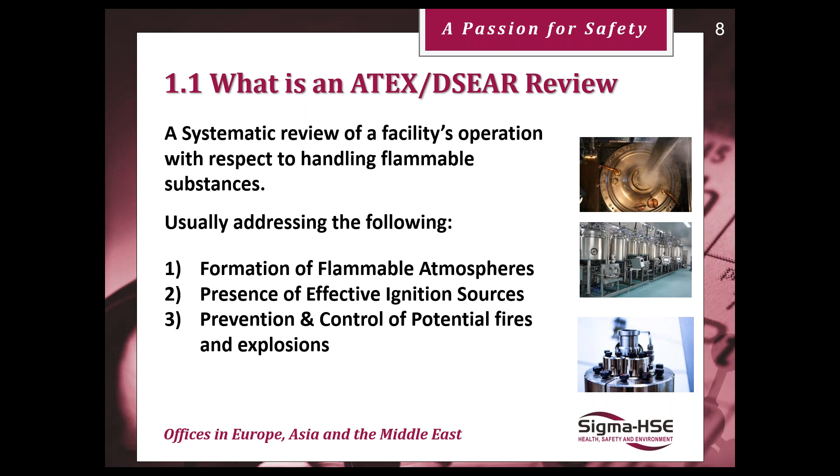So one part of your DSEAR assessment will define that basis of safety around those three aspects: trying to avoid flammable atmospheres, either by working under vacuum or working under a nitrogen inertion system, or working at temperatures below the flash points of liquids; avoiding ignition sources, having ATEX certified equipment, whether that's electrical or mechanical, if it's present within one of those hazardous zones; and then having our explosion protection of venting, containment or suppression, coupled with explosion isolation. So if an explosion does occur in one item of plant, it doesn't progress onto other items of plant and cascade, if you like, through your processing operation as a whole.

Okay. So the hazardous area classification has determined these zones, and it has also, by calculation or other means, determined the extent of that hazardous area, the size of it, whether it goes up, whether it goes down, dependent on vapor density, or how big it is. Are we measuring a 0.5 meter zone around the release point, or are we talking a 3 meter zone around the release point? And the whole idea of the legislation is, if there are potential sources of ignition within those hazardous extents, then the equipment needs to be specially protected, so-called ATEX certified equipment, which effectively just means that those pieces of equipment have been designed and built to reduce the probability of that item of equipment acting as an ignition source in its own right.

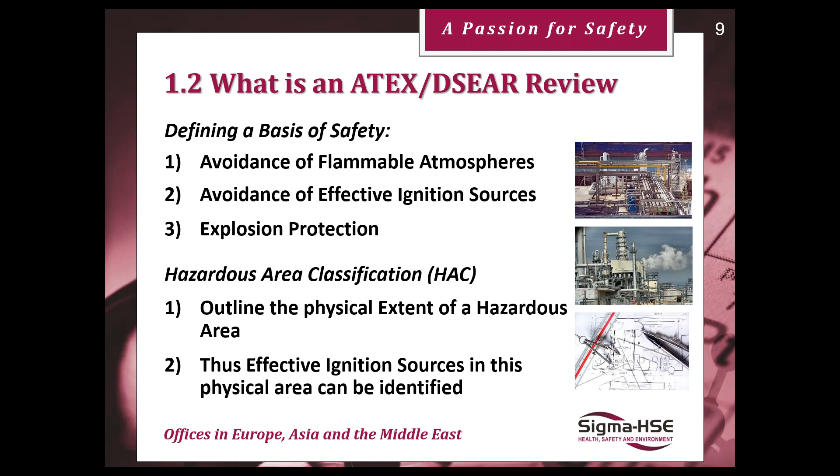So the review is simply something that we undertake when the risk profile has changed. The legislation doesn't actually state how often a review should take place. As with most legislation, it's all based on risk assessment, and it never really stipulates how often a review of the risk should be undertaken, with some exceptions. If we're talking about major accident hazards, typically in the UK under the COMAH legislation, or in Europe more widely the Seveso legislation, that does require a formal review every 5 years. But there we're talking of major accident hazards rather than more general hazards, even though we're dealing with fires and explosions.

You've got to remember that this legislation, ATEX and DSEAR, isn't dealing with major accident hazard events. It's dealing with what I call operational weeps and seeps, things we expect to happen on our processing equipment. We expect a flange to leak occasionally. We expect a pump seal to leak. We don't expect a 10,000 litre storage tank to just break open and release its whole contents into the bund. Yes, that can happen and has happened, and if you're doing major accident hazard risk assessments, you would consider these things. But the likelihood of those consequences is a lot lower than the smaller consequence but higher likelihood events that DSEAR and ATEX are addressing.

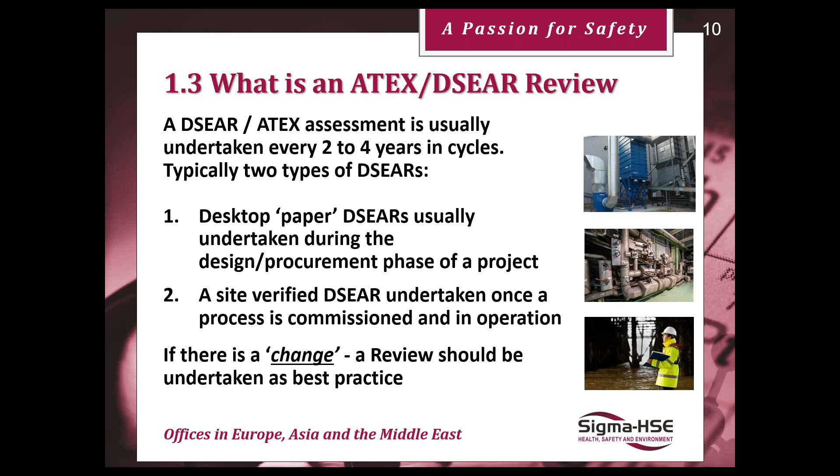But what the legislation does say is if there's a change to the risk profile, then the DSEAR risk assessment should be reviewed. And as I say, best practice is really, even if there's no changes, every 2 to 4 years is considered suitable. Why do we need to do it? Well, to make sure that the process remains safe. We've put a lot of work, we've put our measures in place. They all need to be effective to make sure that the overall system is safe enough and we're compliant with the legislation. So it is a legal requirement.

It also gives you the opportunity to refresh people's awareness of what DSEAR and ATEX is around and the measures that you've installed and how they're supposed to be operated and maintained and inspected properly. And after 20 odd years of the DSEAR legislation within the UK and the ATEX requirements in Europe, finally the insurance companies have cottoned on to the fact that processes involving potentially flammable and explosible materials really need to have a DSEAR assessment. So we get lots of work this way: insurance companies come in to assess the risks, ask the question, have you got a DSEAR assessment? And very often, even now, they're getting blank looks because nobody knows what a DSEAR assessment is.

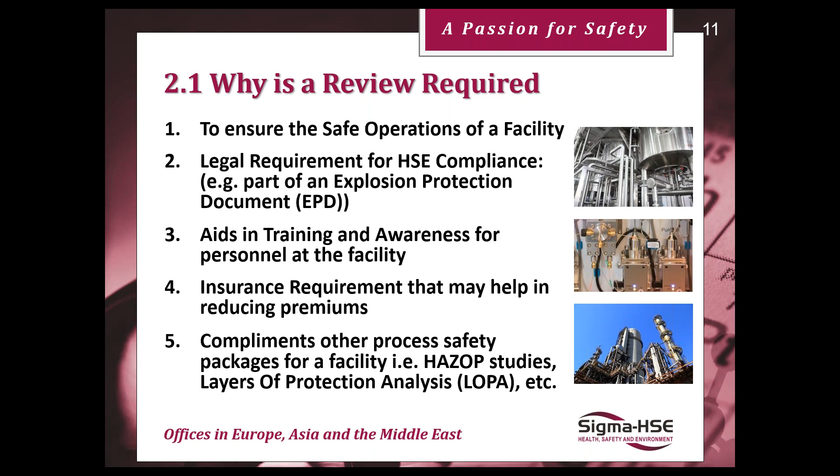But it's just another risk assessment. It's nothing different really, other than it's got specific requirements under specific legislation. But it will complement other process safety studies that you may have done, like HAZOP for new designs, like HAZIDs, like what-if scenario analysis, layers of protection, and so on. All of these studies, when they identify a hazard, you will write down the measures that you've got in place to prevent, control, or mitigate that hazard. And some of those measures will be specific things like having ATEX equipment, ensuring that ventilation systems perform effectively to keep the flammable atmospheres eliminated from your process, and ensuring the integrity of your nitrogen inertion systems, and so on.

Other reasons why a review may be required: just like any risk assessment, it's as good as the people on the day doing that study. We are tasked with almost an impossible task under any of the legislation because the first step in our hazard identification is identifying all of the hazards. And that can be a very tall ask, but that's what we're tasked with. So if we forget a hazard or we don't realise there is a hazard, then of course we won't have put any measures in place to protect ourselves against that hazard or manage it. Although the legislation, ATEX and DSEAR, is relatively simple in its concept, as with most things, it can get pretty complicated very quickly.

So electrostatic hazards may have been overlooked. Dust and powder hazards may have been overlooked. We may not know the specific dust explosibility of the materials that we're using. We're relying on MSDSs that just tell us that a powder may burst into flame, which is very typical. But we don't actually know, for example, how much energy is needed to ignite this dust cloud. Is it a few millijoules or is it more than a joule? It makes a difference.

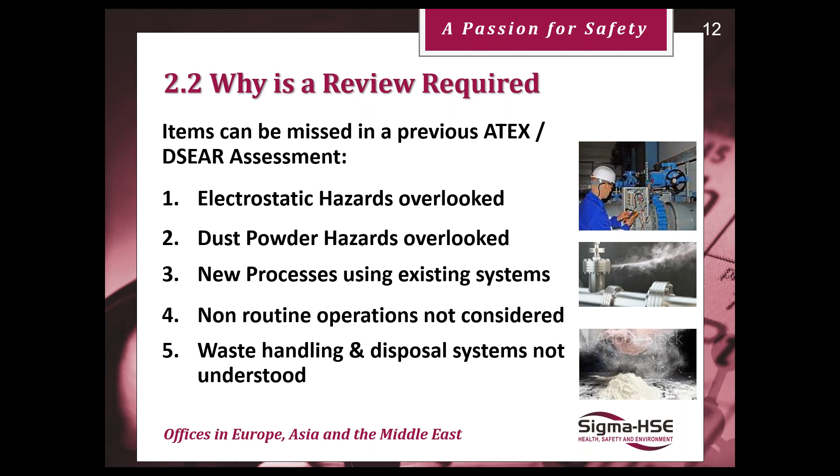We could have added new processes using existing systems, although hopefully these will have gone through the management of change, and that will have prompted us to at least review the ATEX and DSEAR assessments. Very often, DSEAR assessments focus on the routine operations, but don't necessarily focus on things like maintenance. For good reason, because for many maintenance operations, part of the approach, especially if we're working under permits, is to remove the hazards at source, to flush the lines clear and remove any flammable vapors. And of course, our waste handling and disposal systems may not be fully understood in terms of their hazard potentials. So just a few reasons there as to why we should be doing a review.

When a review is required, normally your DSEAR assessment will be split into what we define as unit operations, things like material loading and storage, or material transfer operations, or mixing and blending and grinding and so on, all of which can change. You know, performance of the ventilation systems installed, the extraction systems installed, may not be the same as they were when they were first put in. The materials that were handled may not be the same.

And this is really important when we talk about combustible dust, where we know, if you've listened to some of our previous seminars, we talk ad nauseam about particle size distribution being important for the generation of combustible dust clouds. So with a standard solvent, say toluene or acetone, we know things don't really change. We can have a different supplier of toluene, and really it doesn't make any difference to the risk assessment.

But if we change our supplier of a powdered product and it turns out to be having a larger dusty component, you know, it's been ground more, or part of your processing operations, you're grinding the material finer for a particular product or whatever, then of course the precautions that you've got built in may now not be suitable, or may need upgrading to deal with this lower particle size. Okay, and things like that.

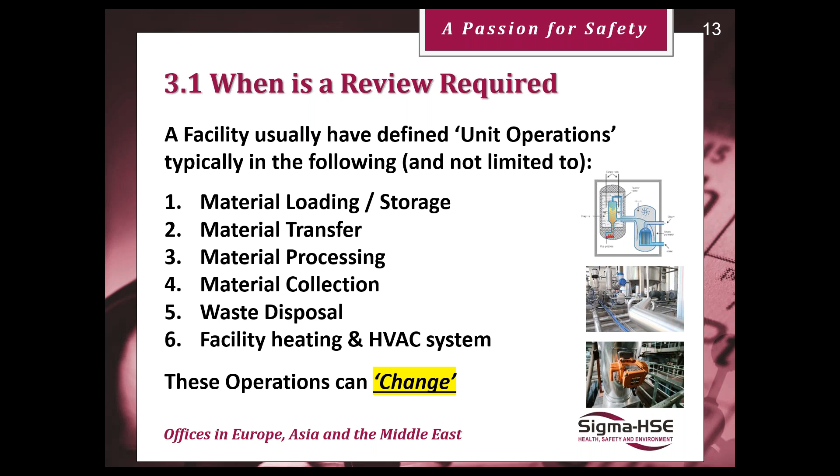So lots of things can change, and we need to be able to get at those changes and assess them properly to make sure that the systems we're employing, the methods of preventing ignition sources, the methods of controlling flammable atmospheres, the measures for ensuring that the venting is sized appropriately, and so on, may need to change if we go for different suppliers of existing materials.

So when there's a change, when we introduce a new process, material, or equipment, or if the equipment's starting to get old. Nothing wrong with old things generally, there's nothing wrong with old people like me, but generally as things get old, we need to look after them better. I rattle a bit more now than I did 10 years ago because I have to take certain pills every morning. That's a fact of life with older people. It's equally a fact of life with older equipment. We may not be able to get exactly the same seals on that piece of equipment that we used to get because it's now getting on in years.

Changes to an existing process. So as I say, running the batch time longer. You're being very successful, so instead of 1 batch a day, you're now doing 10 batches a day. Nothing's changed from the hazard point of view, but your zoning may have changed. Where before you could say that it was a zone 21 or a zone 1, it may now, because of the frequency of operation, actually be a zone 20 or a zone 0.

Okay. The way we do things might be different. We may have started adding flammable liquids below the surface of water, and that controls flashpoint really. But we may change, and standard operating procedures may change and say, well, we add the flammable liquid into the pot first, and then we put the water on. So things like this may change. Your ventilation characteristics in your rooms or in your buildings or around the facility may change because they become more congested, or the performance falls off.

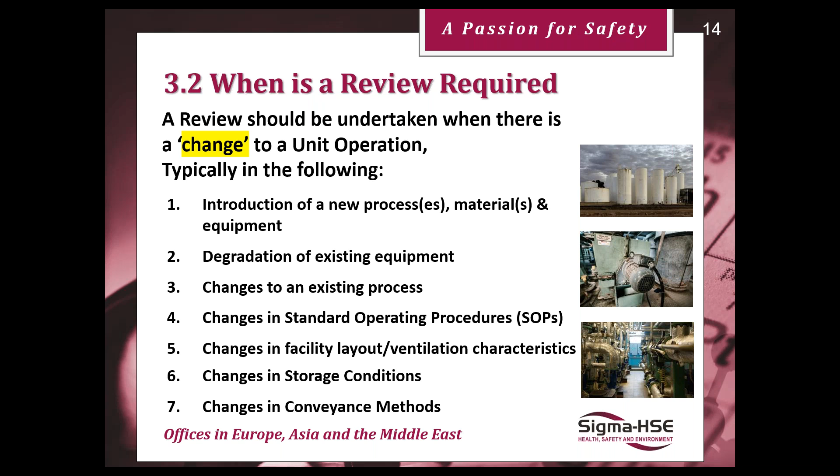Changes in your storage conditions, changes in conveyance methods. So you're still just transferring from one process to another, but you're doing it in a different way. So the risks will change, whether you're using pneumatic conveying or screw conveyors or bucket elevators. If we change these sorts of things, then the risk assessment will change. It should prompt us to carry out this review. So when we make a change, we're looking for the impact on the extent of a hazardous area, how big that hazardous area is.

For example, if we move from filling from 25 kilo bags to using flexible IBCs, the extent of our hazardous areas is likely to increase. For a spillage from a 25 kilo bag, we may have determined the hazardous extent is 1 metre, but if we drop a flexible IBC and cause a spillage that way, common sense hopefully indicates that we'll have more than 1 metre now, and the dust may go up to 3 metres, for example.

The zonal classification, as I've said, looks at the frequency with which we do these operations, the frequency with which that flammable atmosphere is present, and the type of equipment protection that we've got. Very typically we find that ATEX equipment may be installed and it's certified for flammable vapors, but then we make a change and start adding some combustible powders into the mix, but the equipment isn't certified for combustible dust. It's only certified for combustible vapors.

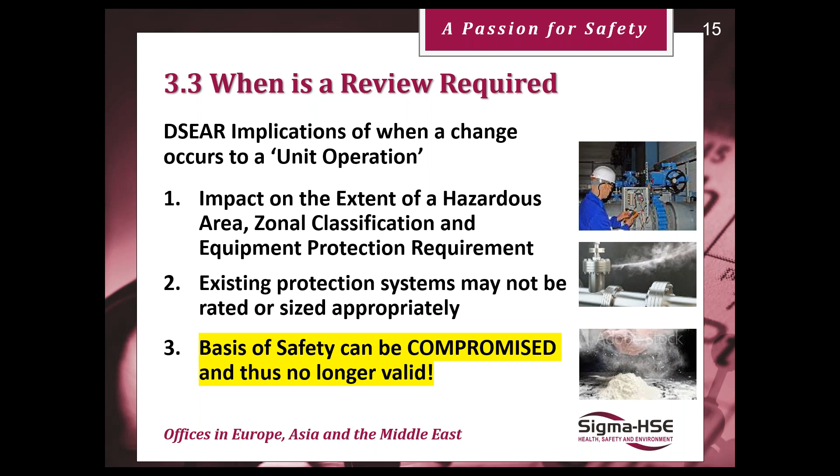Things like the minimum ignition energy for that powder may be different. Wheat flour, for example, could be greater than 1,000 millijoules minimum ignition energy. Rye flour can be down at 50 millijoules. So we would need increased controls around electrostatic hazards if we simply make the change from wheat flour to rye flour, for example.

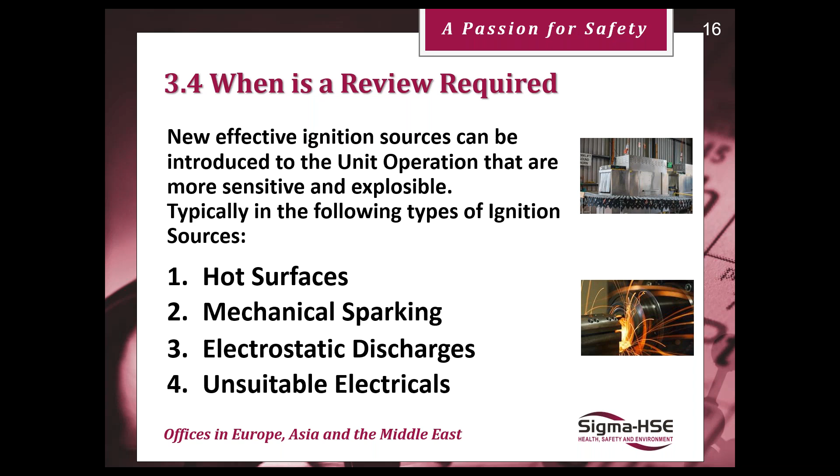And of course, we can have new effective ignition sources. As it says in the standard, there are 13 types of potential ignition sources, but the main ones in the processing industry are hot surfaces and mechanical sparking. So if we change the seals, the clearances, or the materials of construction, that can all have an impact on mechanical sparking. Then electrostatic discharges, and the presence of unsuitable electricals, so uncertified equipment present when it should be certified within our hazardous zones.

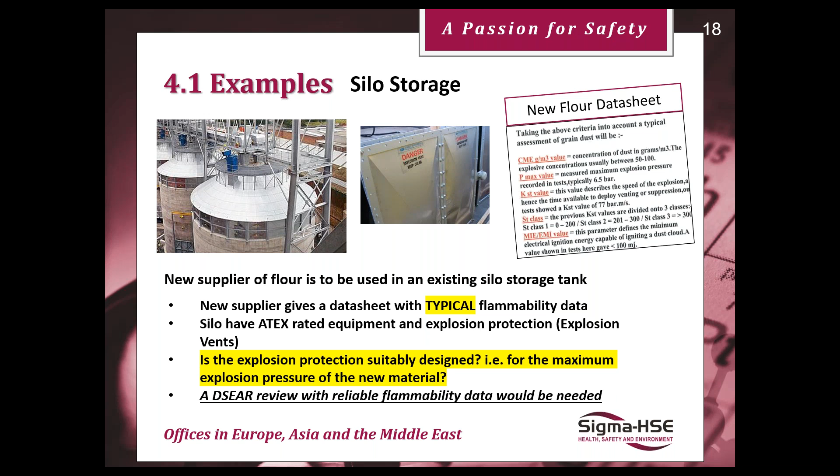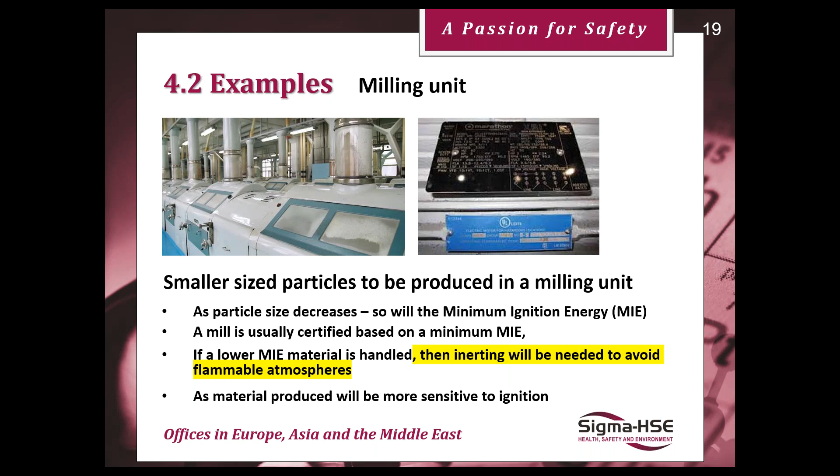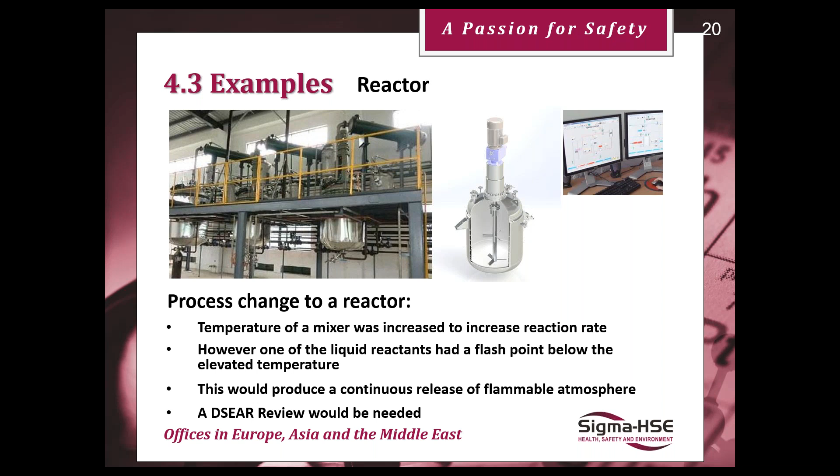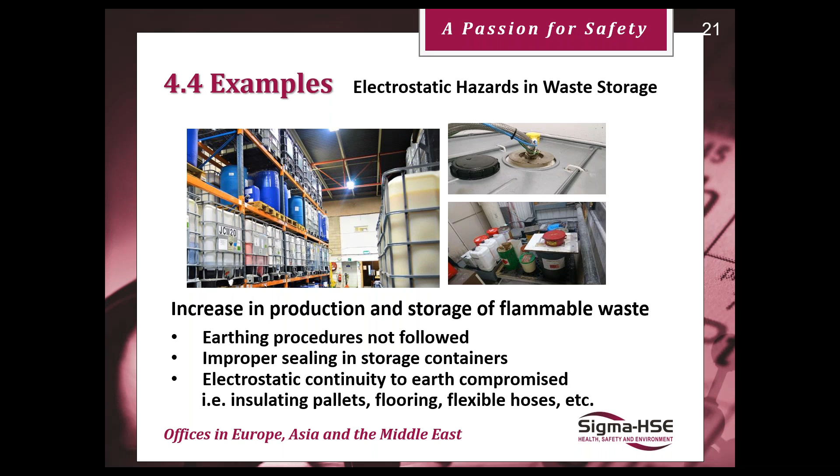And similarly, in these sorts of operations, fixed pipe work is less frequently used. We have flexible hoses, which could be a potential source of ignition from an electrostatic point of view. So they need earthing, and so on. So what we're trying to do from this review is make sure that the basis of safety remains valid, we're still safe, that our measures that are installed will still be effective against the materials that we are currently using or plan to use if they're different.

So we may need to get some more testing done to understand the flammability data, especially things like maximum pressure development, if we're using venting or containment as our explosion protection, things like minimum ignition energy to make sure that all potential effective ignition sources, now if they're a lot lower, we can still deal with them. If we're using inerting systems, if they change or if we don't do them properly, we need to make sure that we are below the limiting oxygen concentration, and that of course changes with the material. That can range from something like 18% oxygen down to less than 5% oxygen.

And how do we ensure that? And if it's really important, we may need to consider increased integrity instrumentation around inerting systems, which we develop through techniques like LOPA, to try and reduce the probability of the inerting system becoming ineffective. Changes of standard operating procedures, changes of the ventilation characteristics, all the things that have an impact on either the hazard or the likelihood of that hazard coming about.